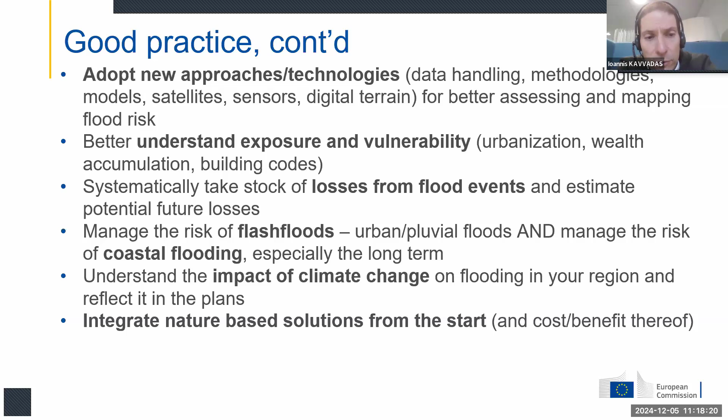urban settings, but also coastal flooding, which many member states are taking into account. But the question is whether we are looking far enough into the horizon. Understanding the impact of climate change, and last but not least, integrating nature-based solutions from the start. We will get back to this.

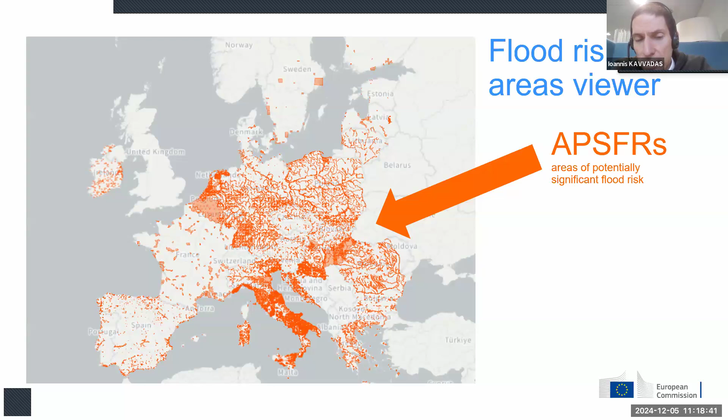So a few slides on the flood risk areas viewer. The flood risk areas viewer is showing in orange color, as you see here, the areas of potentially significant flood risk in the European Union, which were identified during the preliminary flood risk assessment that the member states have carried out. Currently, there is a bit less than 14,000 areas of potentially significant flood risk in the EU.

And the way the viewer works is very simple. Actually, it's a gateway, a platform to what the member states have produced, and the member states have produced a lot around flood risk management.

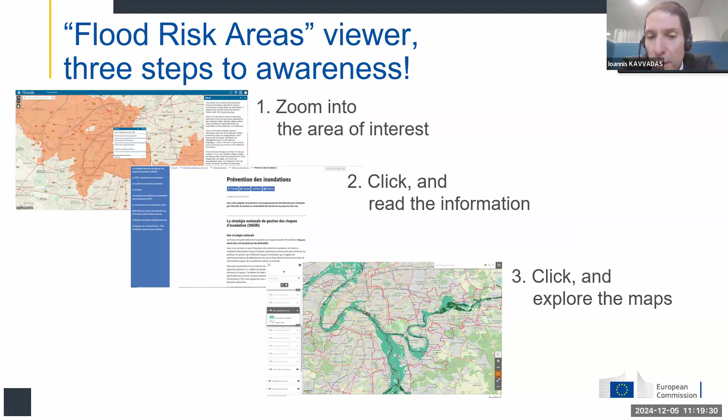So through the flood risk areas viewer, the visitor can click on an area, on an APSFR, and then proceed to the national websites where they can read in their own language about the preliminary flood risk assessments, or go through the flood hazard and risk maps. And in this case here in the bottom you see an excerpt of the map for Paris and the flooding in green color.

Now, because we had these really ugly floods in Spain recently, let's see how the floods viewer worked. So on the left, you see in orange the areas of potentially significant flood risk. This is an estimation, let's say. This is the entry point, the first step in the flood risk management cycle.

And then in the middle, you see how the model has predicted the floods. This is a 500-year return period, fluvial, so river flood around the city of Valencia, and in yellow.

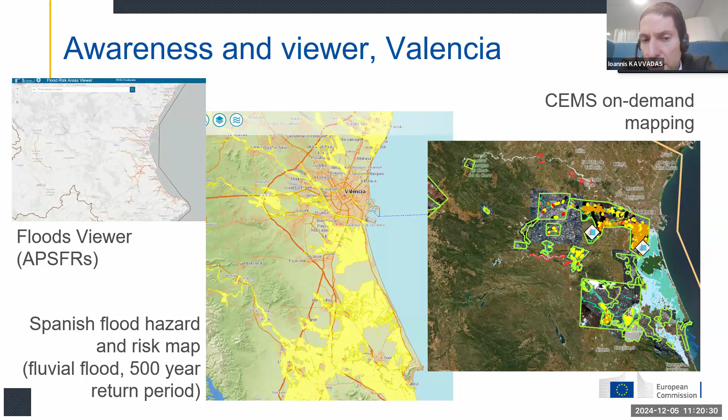And on the right-hand side, you see a print screen from the Copernicus Emergency Management Service on-demand mapping, which depicts the actual situation. So if you compare the middle picture with the right-hand picture, you will see that the models worked pretty well. So the problem was somewhere else in the chain of command, let's say.

Now, if we turn to nature-based solutions, I reversed the order of the slides because usually we show the literature in the end. But here I thought, there has been an astonishing amount of work already, as I go through the slides on nature-based solutions, and more particularly on nature-based solutions in connection to water.

Okay, most of us know what we are talking about. Basically, three pluses: renaturalize ecosystems, make water as it used to be, so pristine, keep water where it is or slow it down, so let's say quantity management, and cleaning water, so quality management.

And there are two clear bonuses out of nature-based solutions: all of the above together, so they are multifunctional, and mostly there are no-regret solutions, regardless of how climate change evolves. Of course, nothing is a panacea in this world. So nature-based solutions are also not a panacea, but they have a distinct role to play in the flood risk management ladder, maybe shaving off the peak of the flood, for instance.

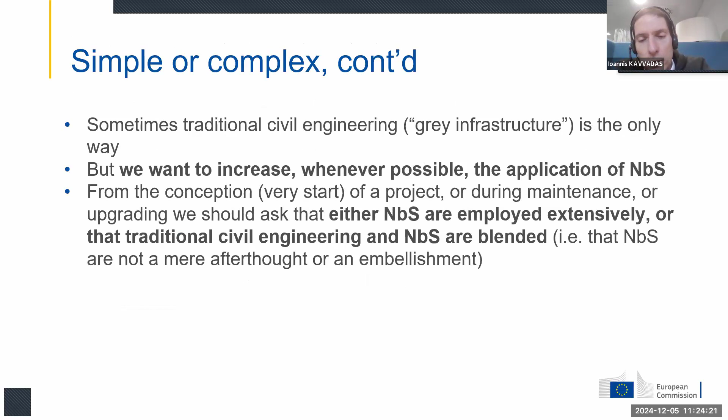But we are getting there. So the main message from our side, also from an engineering perspective, is that nature-based solutions, in order to be employed extensively, need to be thought of as a solution from the very start of the project, and not as an afterthought. So from the very start, blended solutions: traditional civil engineering and nature-based solutions.

Some challenges to furthering the cause of nature-based solutions: insufficient awareness, which will take some time to address; possibly regulatory and policy hurdles; accounting for costs and benefits, as these dimensions are important to make the discussion more credible; limited workforce knowledge and skills, which goes together with insufficient awareness; and the fact that they are not always standalone solutions - but this is something we can solve if we consider them properly from the beginning - and insufficient funding so far.

Although we see that, like in the example of the European Investment Bank, more and more financial institutions are willing to invest in nature-based solutions.

So where could we go from here? Soon we are going to publish our assessment of the second flood hazard and risk maps and the second flood risk management plans - you already have the link there. The assessments are not there yet, but they will be, we hope, still in the first quarter of 2025. Before that, we are going to publish a report to the Council and the Parliament with a lot of information from these analytical assessments. The third cycle of implementation of the Floods Directive is underway, 2022 to 2027.

You may have seen that in the political guidelines, there is a new European water resilience strategy. We are currently working on this strategy. The new commissioner, which used to be for environment, is now more explicitly on environment, water resilience, and a competitive circular economy as well. In the mission letter that the commissioner has received, the water resilience strategy will address water efficiency, scarcity, pollution, and water-related risk. I cannot say more on that. We are preparing an engagement with experts and the wider public, and you will hear more about this soon. Thank you very much.

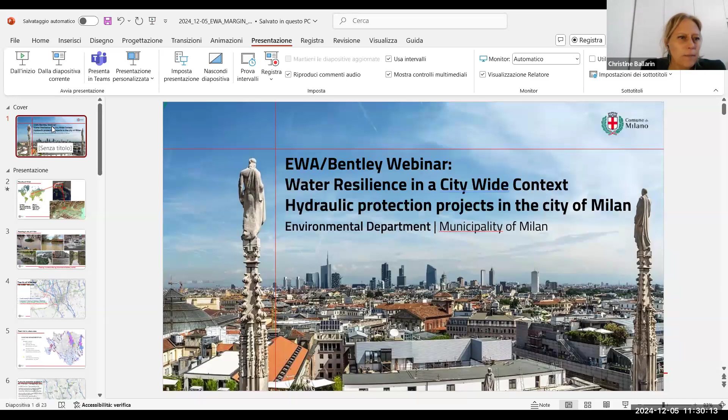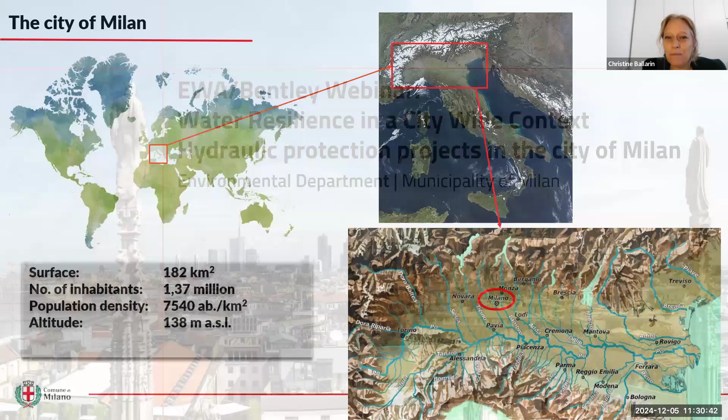I thank Ioannis for his presentation because it was very great, and Milan is inside one of these areas of potential significant flood risk, so we have been dealing with flood risk since the 80s. As you know, it's inside the Po Basin. In the north we are surrounded by the Alps, and in the south we have the Apennines, and we are on the northern part of the Po River.

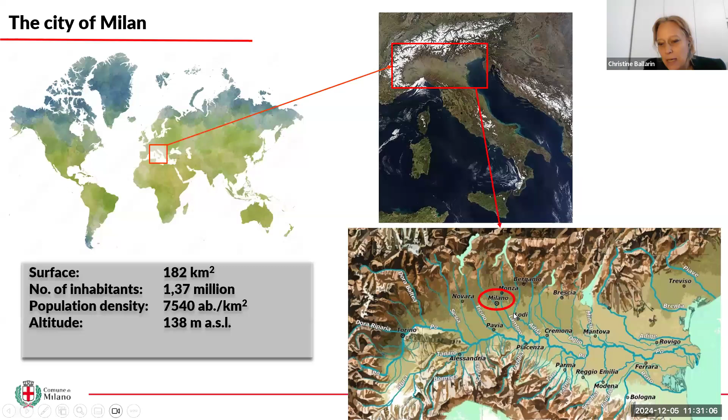So the city of Milan is crossed by several rivers that go from north to south. Here we have some photos of the flooding in the city. This is a problem of many cities in recent years.

And here we have what I was telling you before: the city of Milan is crossed by many rivers. In particular, on the eastern side we have the Lambro River, which is the only one that is open air. The other two, the Seveso and Olona Rivers, cross the city but are fully, totally intubated.

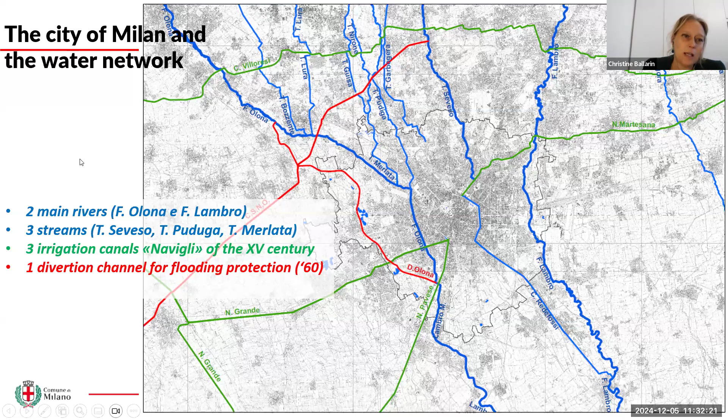Then we have some irrigation channels, and in red, the diversion channel for flood protection was built in the 60s with the aim of intercepting all the flood waves coming from the rivers in the north, and bringing this water to the Ticino River on the western side. You can see it on the picture because it's far away from the city.

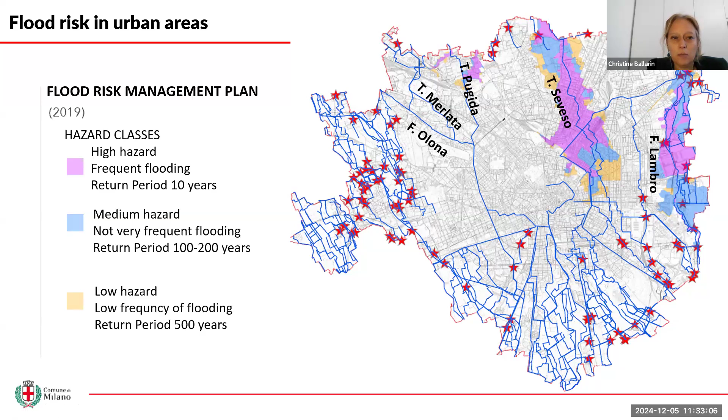We did a two- and three-dimensional hydrological and hydraulic model, and we defined the hazard classes. You can see that a good part of the city area is affected by high hazard flood risk, and in particular, very frequent flooding.

In 2009, the first agreement for the hydraulic protection of the city of Milan was signed between the Lombardy region, the Milan metropolitan city, the municipality of Milan, and the river authority, the Po River Authority. The result of this agreement, to protect the area of potential significant flood risk shown in the picture, the entire project includes 17 detention basins for flood protection and 6 floodplain areas.

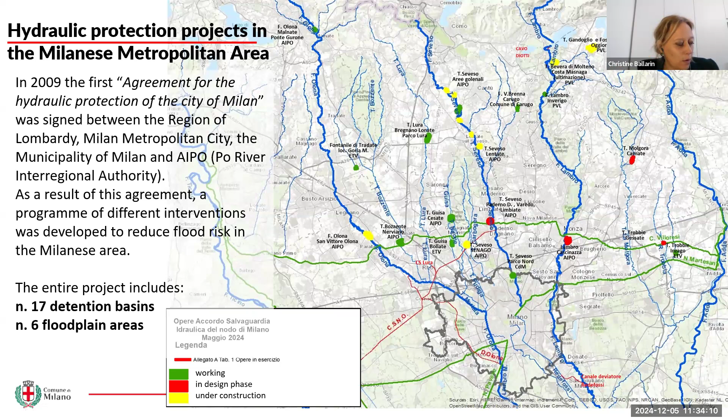The city of Milan is on the south, the lower part of the picture. All these basins are on the rivers upstream of the city. Only 2 of them are inside the city of Milan itself. I will show you these 2 interventions that we have already implemented in the city.

Another way we are facing the flood risk is obviously an alarm, early warning system for the 2 rivers, Seveso and Lambro, to inform citizens about the risk of flooding in the city and about danger in adverse weather conditions, not only flood, but also heat and heavy wind.

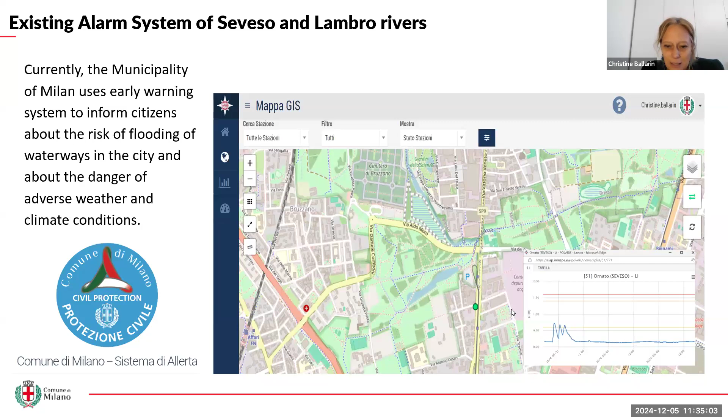Oh, sorry, the presentation isn't... I don't know what happened. Okay.

This existing alarm system is for all landlines that are in the public register of the city and live inside the flood risk area that I showed you before. Whoever answers the call will listen to a pre-recorded voice message informing them of the situation and providing guidance. For all mobile phones registered on the alarm system through an online form, in case of risk...

They are advised, and they can also hear a pre-recorded voice message with all the information on what is going on. There is also an app from the civil protection.

Anyone can download it, and it's free, obviously, and you can have news and updates in real time. We also have internet and social media that inform and update in real time the situation of what is going on in the city.

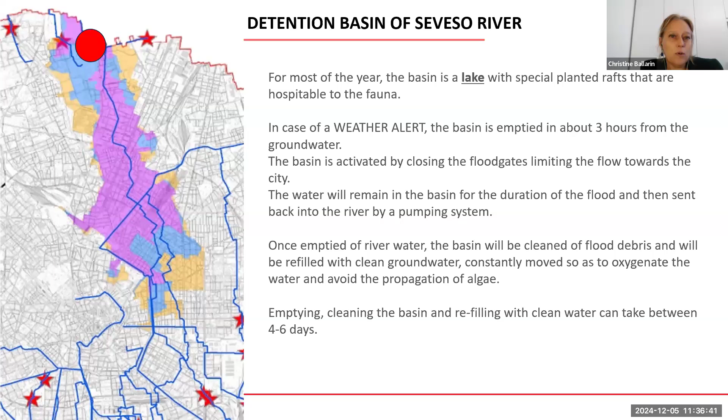I will show you now the two most important infrastructures in the city of Milan. The first is the detention basin of the Seveso River. It is a basin of 250,000 cubic meters. It was opened on the 1st of June this year, and for most of the year it's a lake inside the park, an area where people go during the weekends.

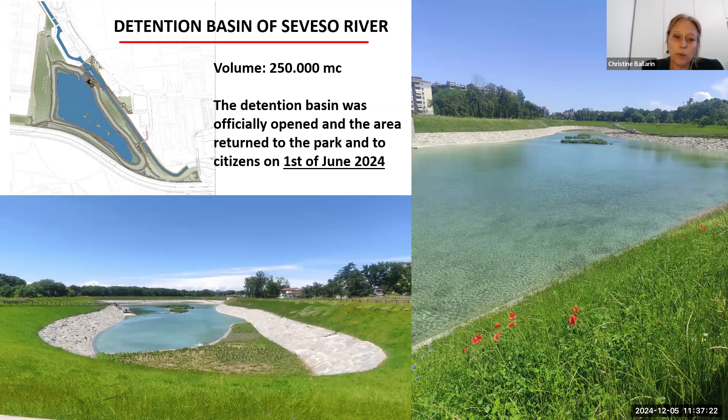It's very nice there, and the lake is filled with clear groundwater for most of the year. In case of alert, the floodgates that bring the river through the city close, because this river is intubated, and the basin is filled with the water of the river.

After the wave is over, the water is pumped again inside the river, and the basin, the lake, is cleaned from all the debris, and then refilled with groundwater that is clear, because the quality of the Seveso River during the flood is not so good, since most of the water comes from the overspill of the sewage system. In the north of Italy, most of our sewage systems are mixed ones.

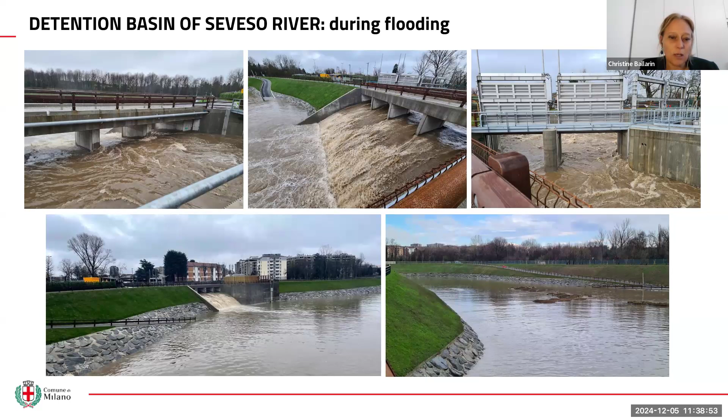All this operation, from emptying the lake, filling it during the flood event, and emptying it again and cleaning it, lasts between 3 and 6 days. It's not a short operation.

Here we have another intervention, on the Lambro River that flows through the eastern part of the city. It's a different kind of intervention - not a basin, but floodplain areas. The aim of this project was not so much to reduce the hydraulic risk, but to return the river to the citizens.

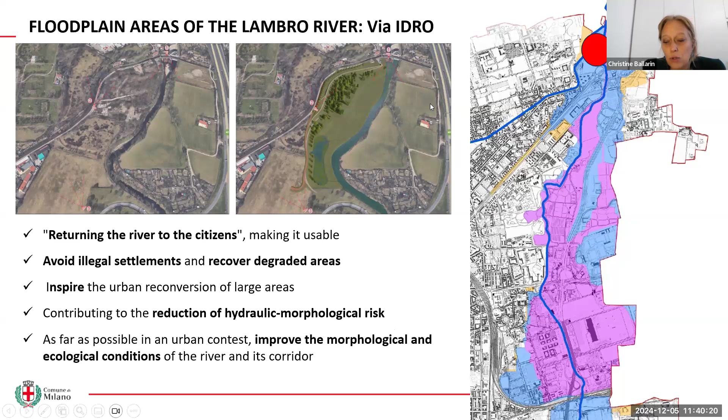The aim was to give a degraded area back to the city, and to use this area not only as a park, but as a real park for the river, where the river can overflow. The aim was also to avoid illegal settlement, because in the past this area was an illegal settlement, and to inspire new conversion of a large area - to reduce hydraulic risk and improve morphological and ecological conditions.

This is what it looks like as of last year, and now the area is under construction. This is how it will be.

Very simple: the embankments that go along the river are moved 200 meters to the left side. So all the area that was also polluted was excavated and the material brought out, to have more volume for the floodplain. So this was a remediation project and a mitigation for risk project, with buffer intentions.

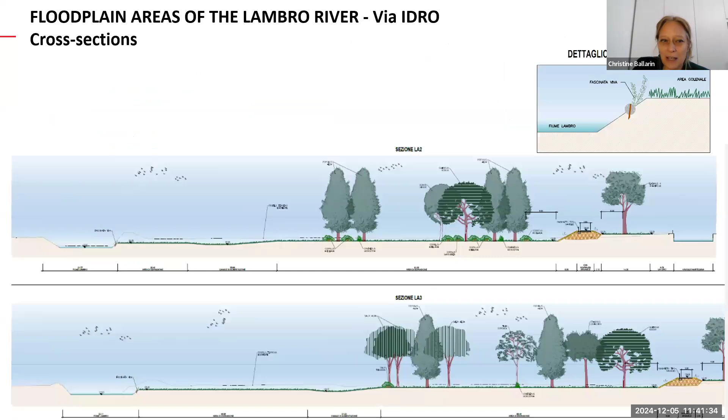We also have a little lake for birds, and this area will be... I can't remember the name of it, a little lake. Here you can see some cross sections of the area.

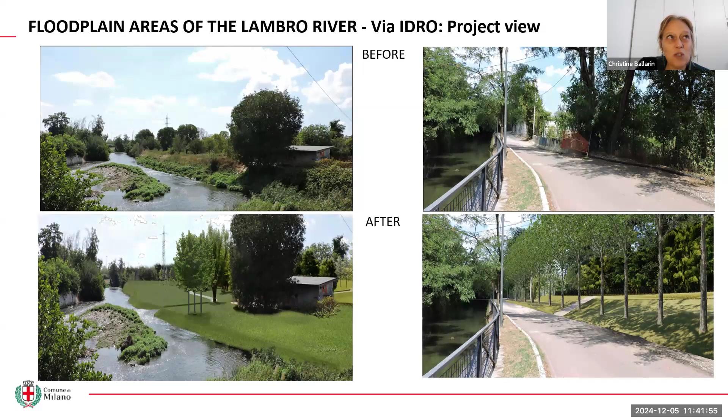Here are some pictures of how it looked before and how it will look in the project. The works will end by the end of 2026.

Another measure we have in the city of Milan is a specific alarm system inside a park. We have a very big park, Lambro Park, near the Lambro River, and we installed optical and acoustic alarms inside the park. They are activated when the water level reaches a certain point, and everybody inside the park has to leave - there are signs with evacuation paths for the evacuation of the park.

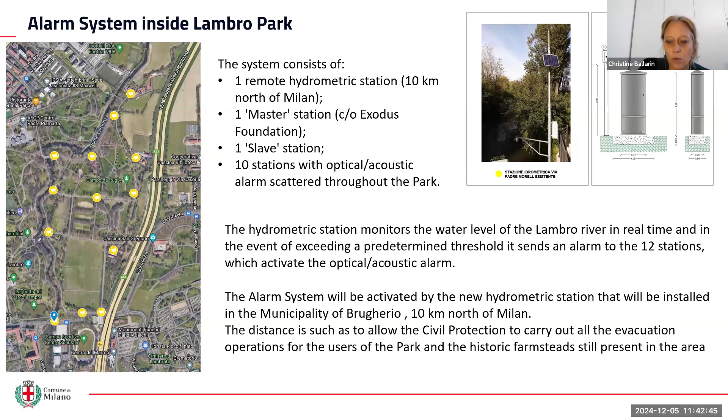Obviously, we are not only managing flood risk with this big infrastructure and early warning system, but also with a program of desealing the pavement of gray areas, and using sustainable drainage systems with SUDS.

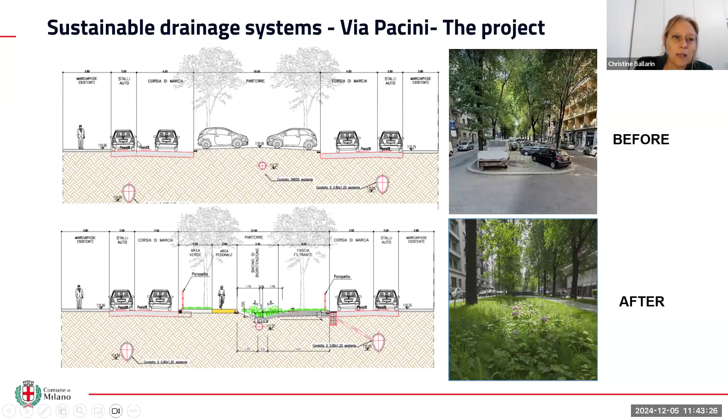This is an example that we realized two years ago in the city of Milan. It was a parking lot for cars between two rows of trees, and now it is a rain garden, where all the water coming from the street goes.

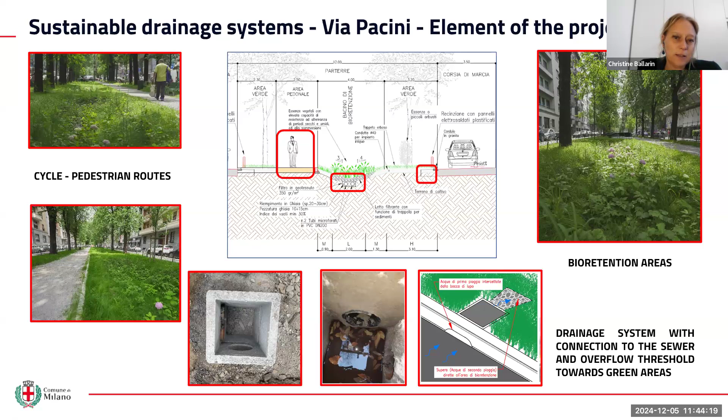But we have a particularity: the first flush of water coming from the street doesn't go to this rain garden - it goes into the sewage system and to the treatment plant. Only the second flush, the rainwater that is not polluted, can go inside this rain garden and then infiltrate into the ground.

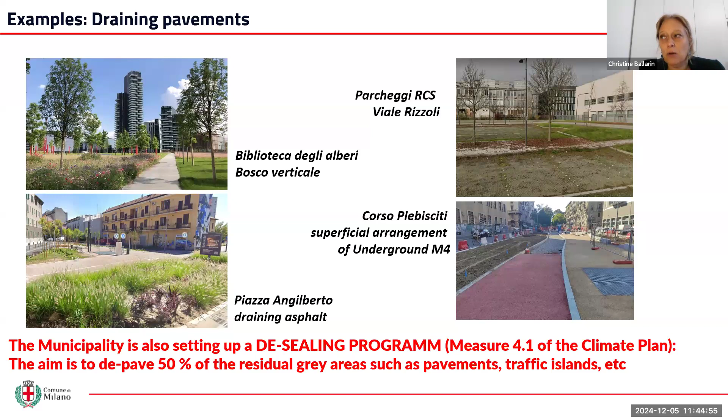Here are other examples of rain garden infiltration systems that we have in the city, and here some examples of the pavement program in the city. These are all gray areas where we deseal the soil and implement permeable pavements or permeable concrete.

I think this is okay. I don't want to... I will leave it. We'll take more time for questions.